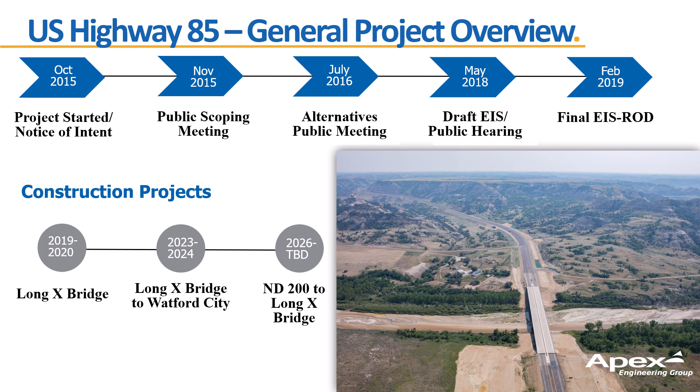This next segment of the US 85 4-lane expansion project begins at the I-94 interchange and extends approximately 31 miles north to the intersection of North Dakota Highway 200. The proposed project is divided into 3 project segments for construction. Beginning at the south end, the first project segment begins at the I-94 interchange and extends north approximately 10 miles to near mile point 86.

The second project segment begins at mile point 86 and extends north approximately 9 miles through Fairfield to near the Gorham Junction near mile point 94. The third project segment begins near the Gorham Junction and extends north approximately 12 miles to the intersection of North Dakota Highway 200. The 4-lane widening will occur on either the east or west side of the existing highway, depending on where you're at along the corridor.

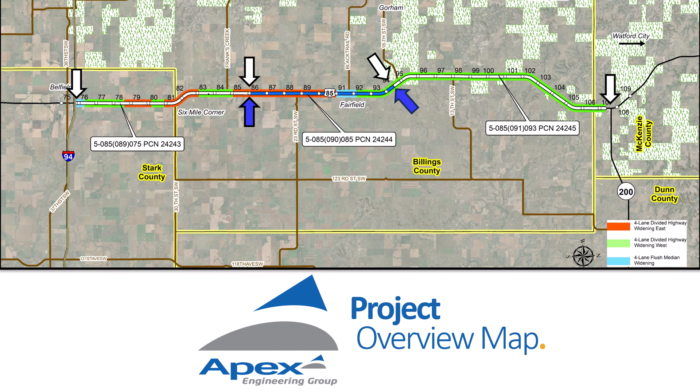The different colors on the map represent the side of the highway the widening is proposed, green representing west side widening and orange representing east side widening. We will review these locations in more detail later in the presentation.

The proposed 4-lane expansion will occur by building a parallel roadway adjacent to the existing highway, offset 84 feet to either the west or east side. The existing roadway will remain in place and the outside shoulder will be widened to 8 feet. A depressed grass median will separate the 2 roadways and the speed limit will be 70 miles per hour, very similar to other 4-lane divided highways across the state, like US Highway 2 or US Highway 83.

The 4-lane divided depressed median section will transition to a 4-lane flush median section through Fairfield, as shown on the typical section below. The speed limit will be reduced to 45 miles per hour through Fairfield.

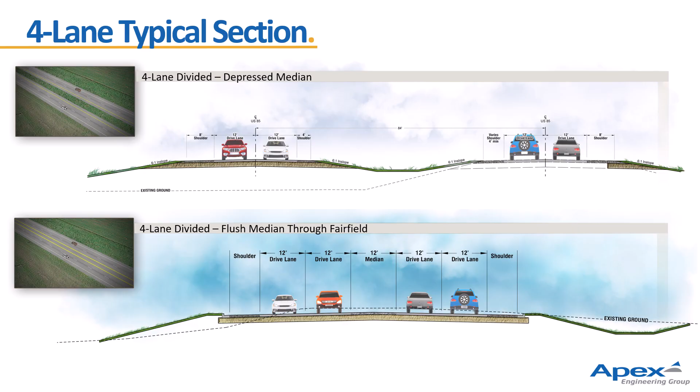Let's start off by reviewing the South Project segment, PCN 24243. This project begins at the I-94 interchange and extends north 10 miles to roughly mile point 86. As you can see on the map, this project has widening planned along both the west and east sides of the existing highway. The reason the widening transitions back and forth is because of the various commercial and residential properties located along both sides of the highway.

One of the goals of this project was to avoid impacts to developed property, therefore requiring the widening to shift back and forth to avoid those types of impacts. Next, we will look at each of these areas in more detail.

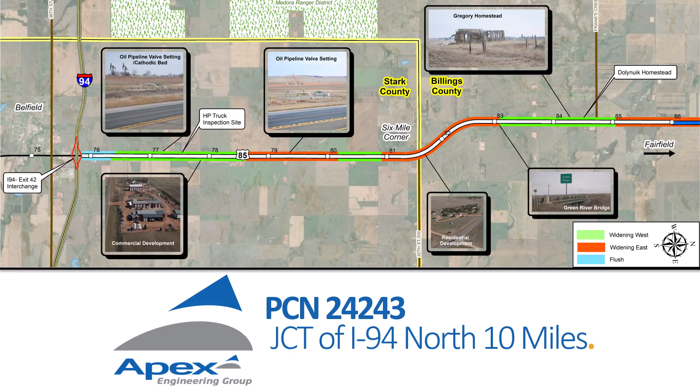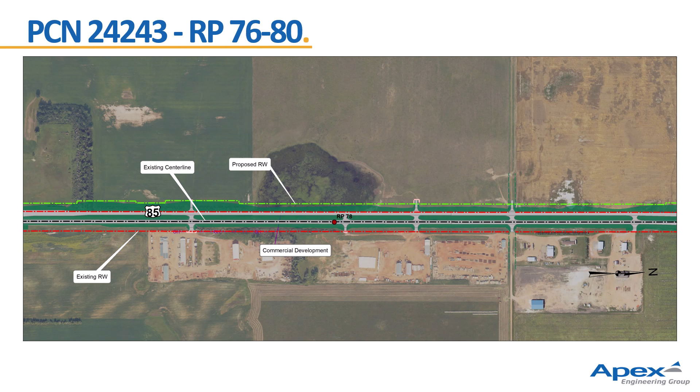The first area we'll start with is located between mile point 76 and 80. As you can see on this aerial photo, there is existing commercial development located along the east side of the highway. So in this area, the widening is planned along the west side. When I advance the slide, you can see how the proposed 4-lane expansion will look along the west side, avoiding impacts to the adjacent commercial properties.

As we proceed to the north, near mile point 79, the widening continues along the west side of the roadway. However, we have some residential properties located along the west side of the road. Therefore, in these areas, we're planning to shift the widening over to the east side. When I advance the slide, you can see how the roadway will transition to shift the widening to the east side, avoiding impacts to the residential properties and an oil pipeline valve setting that you will see in the center of the aerial photo.

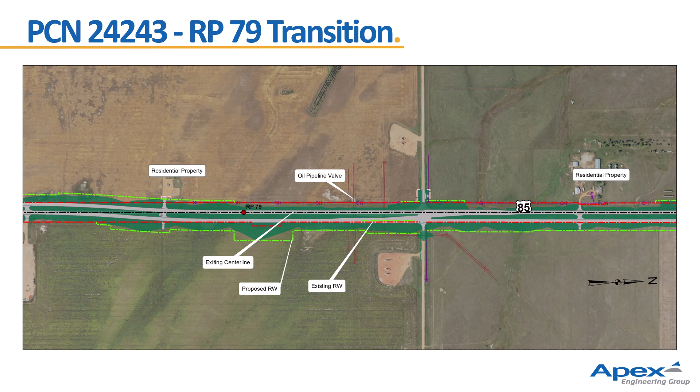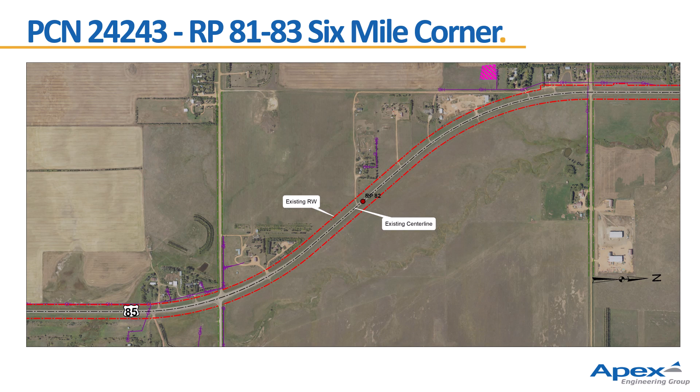We proceed north along the corridor to 6 Mile Corner, and again we have several residential properties located along the west side of the roadway. In this area, the roadway will transition back to the east side around the curves to avoid impacts to the residential properties.

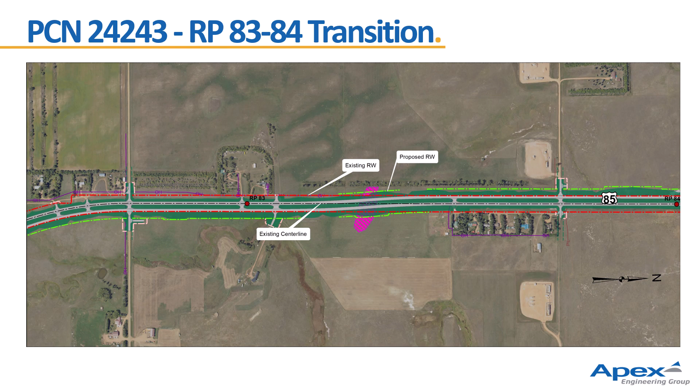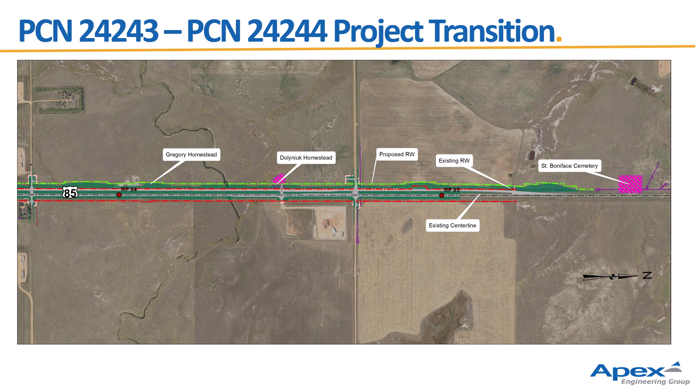Continuing on another mile to the north near mile point 83, just north of the 6 Mile Corner, now we have residential development along the east side of the highway. In this area, the widening will transition back to the west side and continue along the west side north to near mile point 85. At mile point 85, the widening will then transition back to the east side to avoid the St. Boniface and St. Mary's Cemetery and St. Demetrius Catholic Church and will remain on the east side to Fairfield.

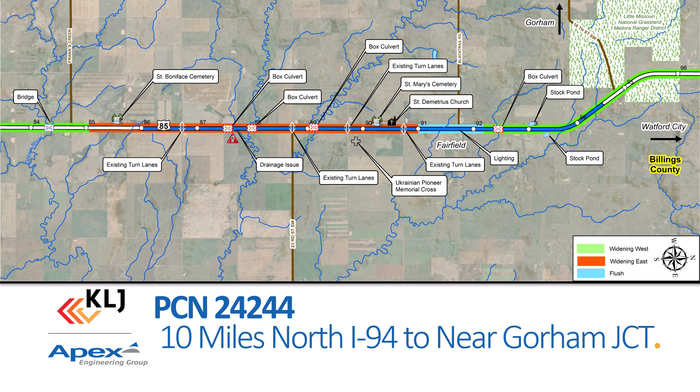That leads us into the second project segment, which begins 10 miles north of I-94 near mile point 86 and extends north approximately 9 miles to near the Gorham Junction. PCN 24-244 will construct a new northbound roadway along the east side of the existing highway up until approximately 1 mile south of Fairfield. At this point, the roadway will transition to a 4-lane divided flush median section, and the existing highway will be widened on both sides to accommodate the additional lanes. North of Fairfield, the proposed design will transition back into a 4-lane divided highway with a depressed median, with the new roadway west of the existing highway.

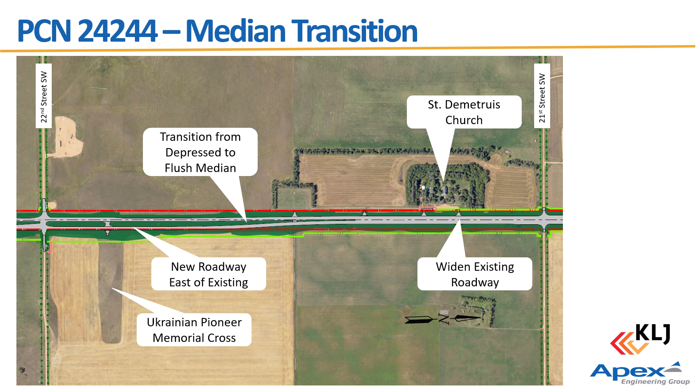This slide shows how the design will transition from a divided depressed median on the east side of US 85 to transition into the flush median section. This transition will occur just south of the St. Demetrius Church. The 4-lane divided flush median section will continue throughout this area on the south side of Fairfield.

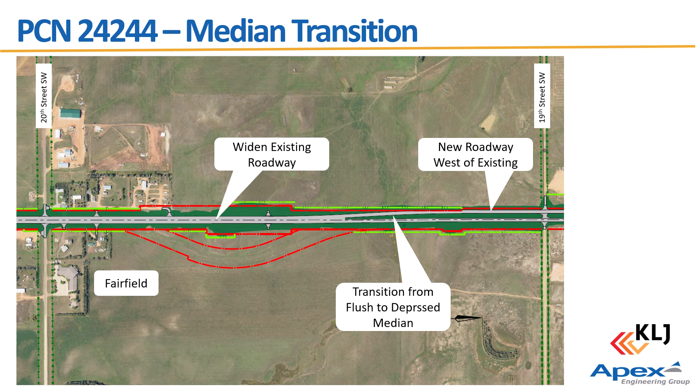Through Fairfield, the roadway will continue as the flush median section and will transition back to a 4-lane divided depressed median on the north side of Fairfield, with the widening along the west side of the highway. Through Fairfield, multiple typical sections are currently being evaluated, including an urban roadway section with curb and gutter. Through Fairfield, the speed limits will be reduced to 45 miles per hour.

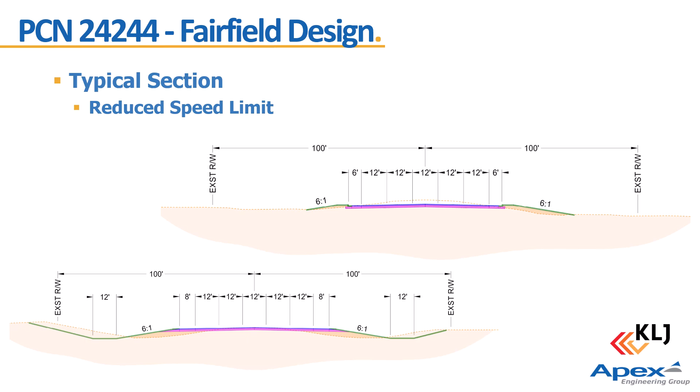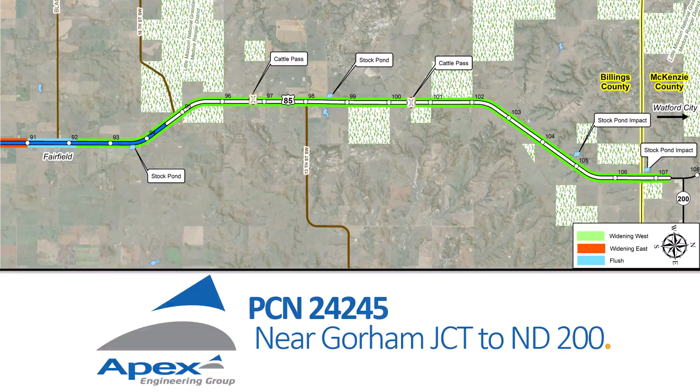So next, let's discuss the process for the right-of-way acquisition that will be needed for this project.

With any planned highway infrastructure widening project, additional land is needed by the North Dakota Department of Transportation to build the expanded highway on, and that additional property needs to be purchased from the adjacent landowners. On this 31-mile segment of US Highway 85, we are estimating that approximately 350 acres of additional right-of-way will be needed for the project. So how does the North Dakota Department of Transportation go about acquiring that additional right-of-way?

The DOT has an established process they use on every project to acquire property. That process is defined by the Uniform Relocation Assistance and Real Property Acquisition Policies Act of 1970, or more commonly known as the Uniform Act. The value of the property will be determined by hiring an independent appraiser that will inspect the property, review the details of the acquisition, review comparable sales, and determine the value of the acquisition.

After the value of the acquisition is determined, the right-of-way agent will meet with the landowner and present a written offer of the amount that is believed to be just compensation. At that time, the landowner can negotiate additional terms of the settlement. For additional information on this process, please refer to the DOT website, dot.nd.gov, and search for the brochure shown on the slide, Information for Highway and Street Projects.